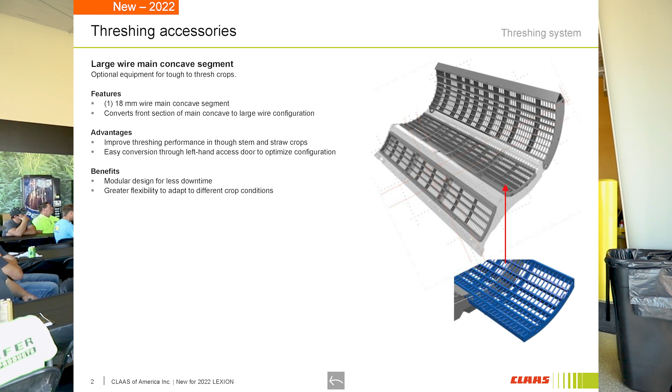So the first option probably doesn't pertain too much for a lot of you guys. This is more for small grains. But if you're doing any wheat or really tough threshing crops, this is an option. You can change out your main concave section for the large wire main concave if you need a little bit more threshing action. Hopefully you don't run into that too much. That can also be used for those with a large amount of soybean acres as well.

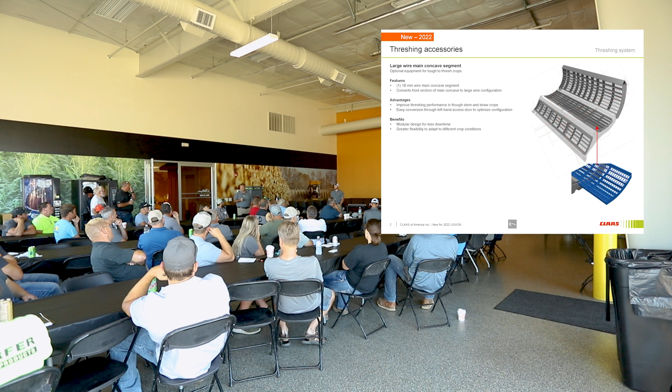If you're cutting a lot of green stem soybeans, that grate can be used for that also. It's the front section of the main concave, which is now interchangeable on the new Lexions. We didn't have the ability to do that on the yellow combines, but we now have that. We can do that on the 7,000 and 8,000 series.

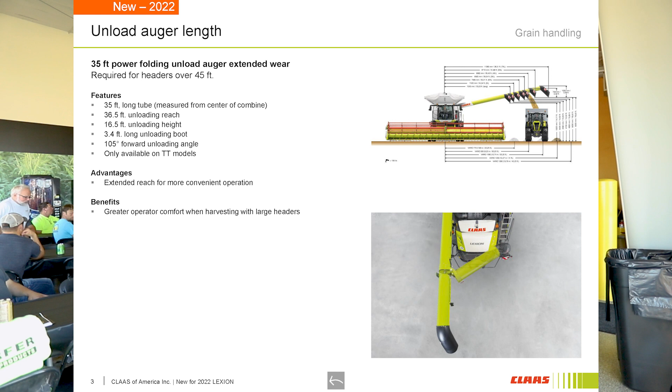Next we got the 35-foot power folding unload auger extended wear. This will be needed for any heads over 45 foot. It's also just a nice option if you're doing a lot of roading in town or in cities, or if you just want that extra space between your grain cart.

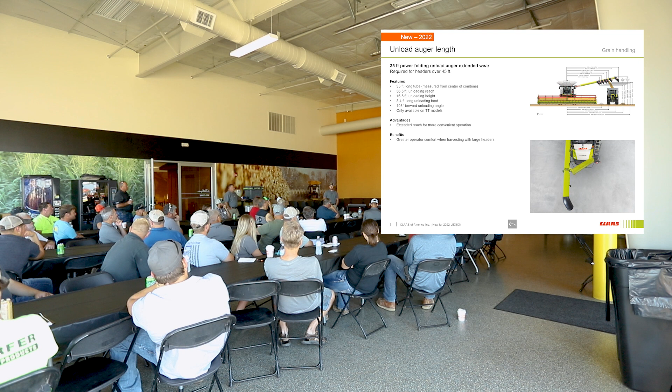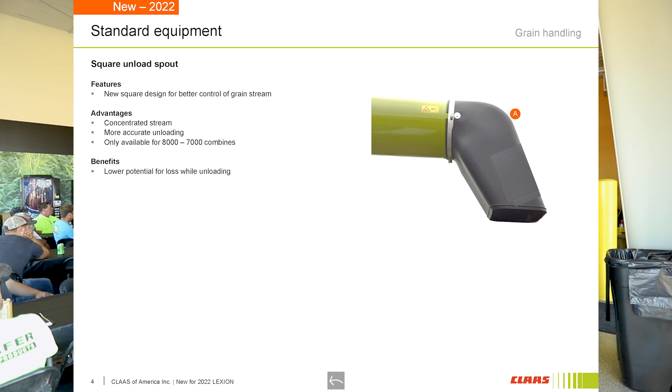I know a lot of guys in hills want a little extra clearance if you're on uneven ground. A lot of you may have noticed with the round unloading auger spout, sometimes you get either a spray or two different streams. We went to a square design to help narrow that path. Helps out a lot if you're unloading into semis and you're not getting those two different piles when trying to fill a cart. Hopefully this isn't something you really need to use.

This is a front axle hitch point. If you guys do need to pull the combine for whatever reason, if you get stuck, this is located on the front axle underneath the feeder house. Again, hopefully you don't run into any issues where you actually need to use this.

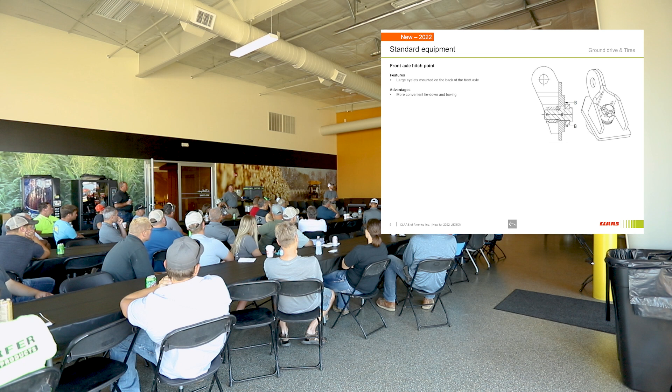Those are actually for pulling from behind. We've always been kind of limited on the ability to pull from behind if the combine did get stuck, so that's what those are there for. Also to help tie down when it's on a truck, but really to give you a better access point if you have to yank it out from the back.

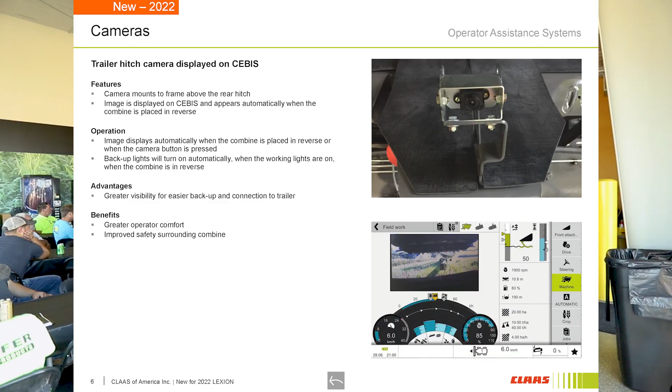Then we have our new trailer hitch camera. It's displayed on the CEBIS. This is a nice option for those of you that pull your heads around. As soon as you go in reverse, it'll automatically pop up on the CEBIS. Helps out definitely if you're a one-man show and you don't have another person back there to guide you. Just a nice option if you need it.

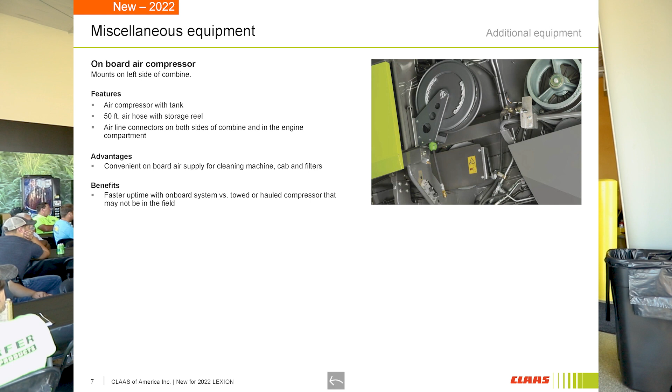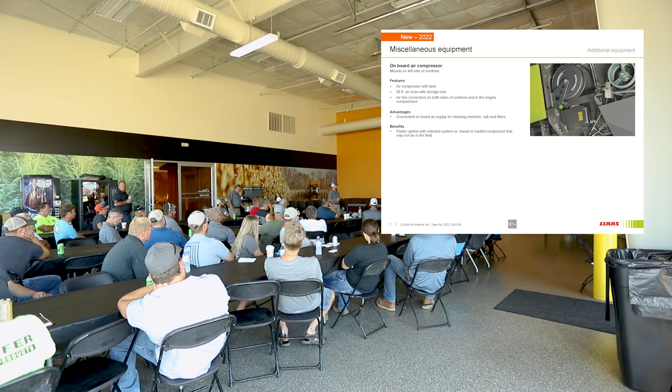Another thing that's pretty sweet is the new onboard air compressor. It does come with the retractable reel and 50 feet worth of hose, and then there's several air ports on the other side of the machine and up on the engine deck. Just kind of helps blow everything off, keep everything clean. This will be standard on all machines starting this year.

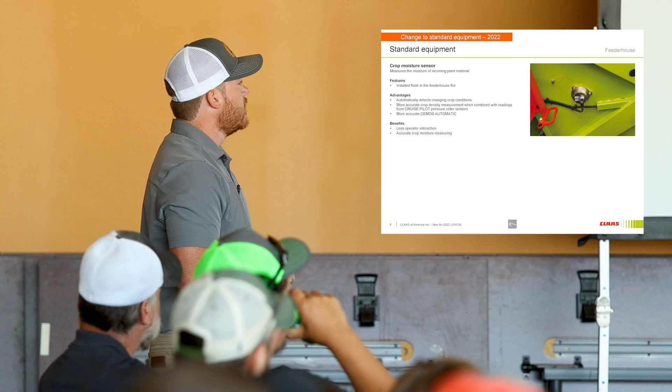This is a crop moisture sensor. It's located right on the bottom of the feeder house. We can show that too in the walk around. Basically, this is just going to measure the moisture of the crop mat coming in, and it's just another input for CEMOS automatic, and just kind of helps determine our changing crop conditions a little quicker.

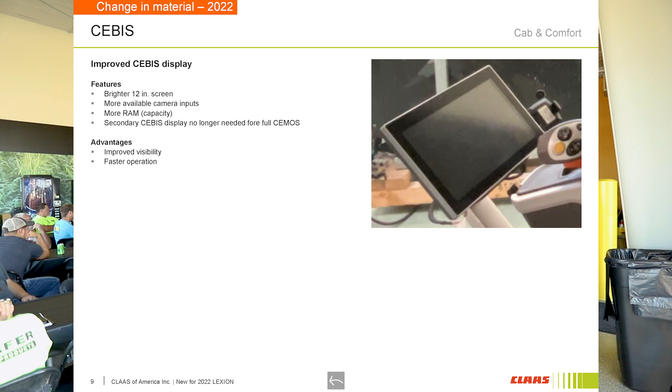The CEBIS has changed a little bit. The outlay and stuff like that's the same, but it is a little brighter, with more camera inputs and a bit more RAM capacity for storage. Jeff will get into this more in his presentation. But basically, this is just more operator input to help adjust the CEMOS auto a little better. If you need it to do something else, you can go in there and actually click on whatever you want the CEMOS to change, and that's going to help dial that in a little better.

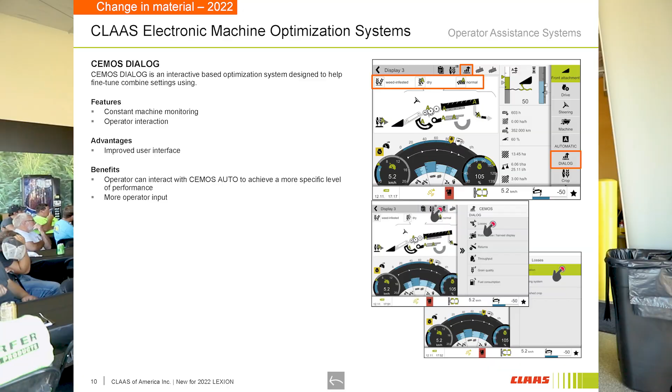So we've moved, one of the advantages of going to a higher capacity display is we can put everything related to CEMOS on the one display, so we no longer need that secondary CEBIS display, which we call CEBIS Mobile, up in the side of the cab. We can do it all from one display now.

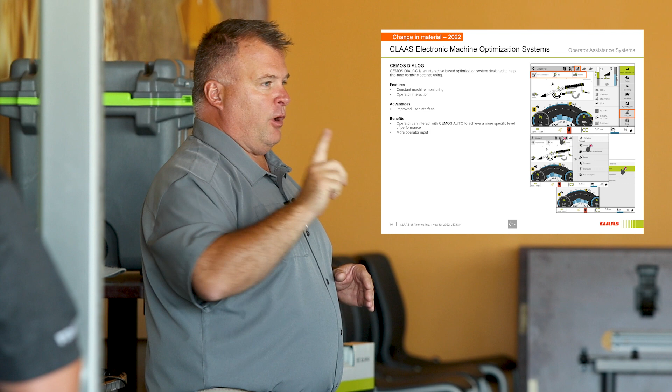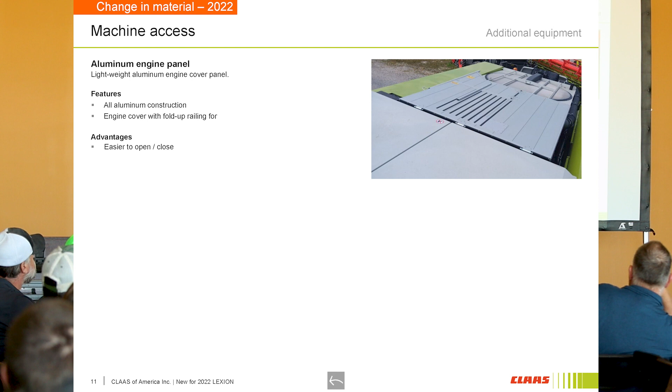Engine compartment door, it's aluminum, a lot easier to open and close, it's lighter, and disperses heat a little better. Not a whole lot to talk about on that. It does look pretty much the same, right, Jeff?